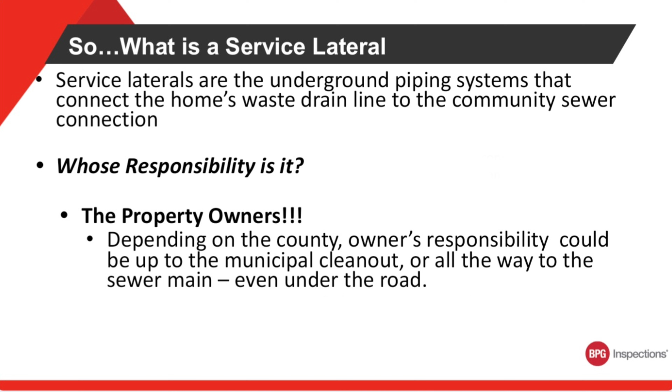So we're going over our basic sewer and camera inspections today. That's the inspection from the main line, or the exit line from the house to the main line on the street. So we'll cover all of these through the webinar.

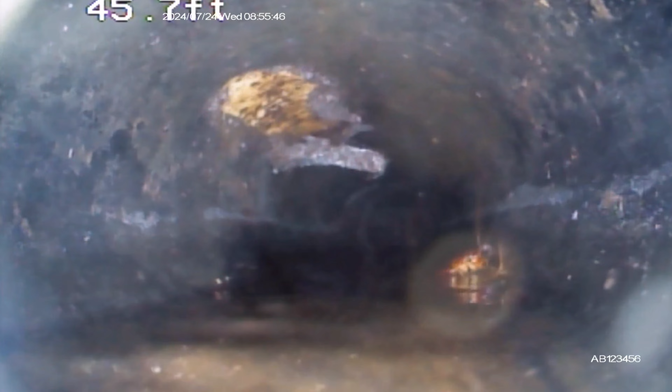We can have problems with new houses, we can have problems with old houses, and as a real estate agent, it's kind of your job and your responsibility to bring that attention to the buyer or to the seller. It's a very easily overlooked system in the house that costs a lot of money to repair.

So this is where we fill in the void, and the whole purpose of doing the sewer camera inspection is to find any debris that might be in the system, any bellies, breaks in the line, offset pipes. It's really to just get a visual inspection of that drain system for the buyer so they can make a decision. We can't provide estimates, but we get a good visual to give to the buyer so they can make a good decision with their real estate agent whether they need to get a plumber to come in and do a full repair or just partial repair.

What does it involve? It involves me using a camera on a very specialized system that has a gyroscopic head to it, so we're always level. When the camera head goes down the pipe, it does a lot of back and forth, but it's always level, and sometimes it goes underwater, telling us that there's a belly in the pipe. Sometimes those are small problems, sometimes they're big problems, but we're not going to know that until that camera gets into that pipe. So it's really important as a real estate agent to be recommending that to your buyer or to your client.

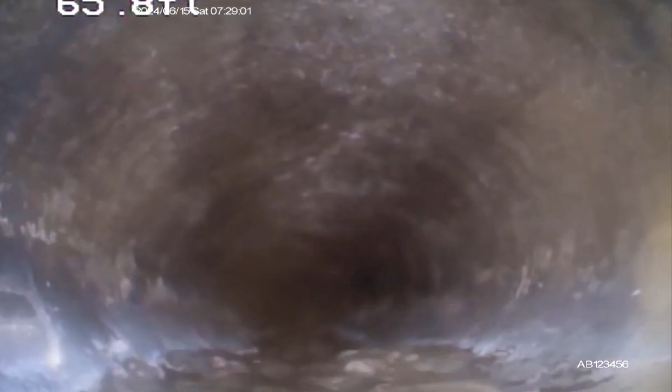Peace of mind is going to go a long way knowing what's underground. A lot of home buyers don't even realize that there's a sewer pipe. They don't even know what it is. They don't even know it's there. Every house has one, and it gets overlooked a lot by real estate agents. It's very common to see a real estate agent just be like, oh, it's a 10-year-old house, ABS pipes, you don't have anything to worry about. And I used to do that too. I didn't want to create more stress.

I would add to that, Dan. It's not just real estate agents, it's everyone. It's one of those things that you just don't see on a daily basis, so you don't think about it. Right. And I don't think about mine either, ever. Until you have a problem, then it becomes a big problem.

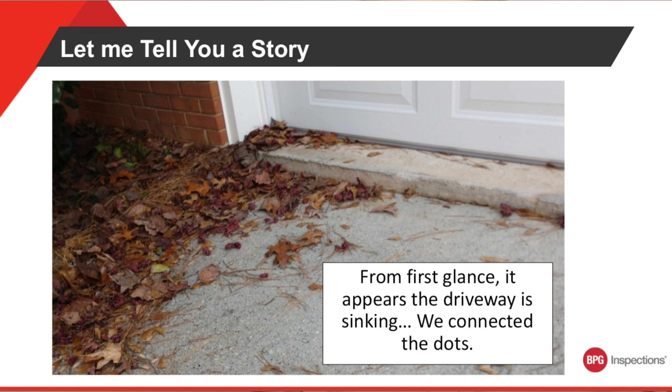But taking a look at a couple examples here, we're looking at the front of a garage where you can see the concrete has settled in the front. We've got some buildup of debris, some leaves. So that's telling me that it's a low spot. It's likely collecting water. And this is not going to be good for your plumbing system if you have drain lines mounted below the driveway, because the driveway is just slowly going to be compressing on top of the pipe.

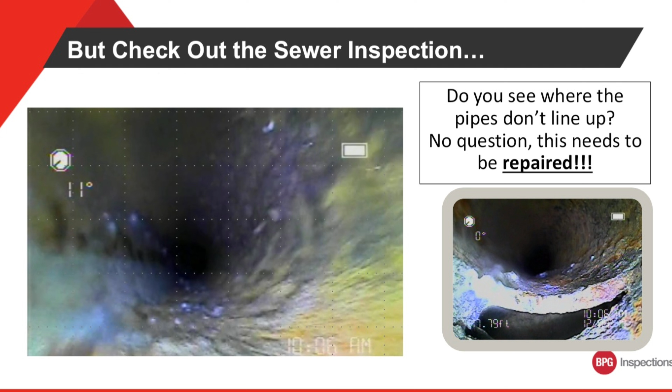So it was really good that we did a sewer camera inspection on this one, because what we found were some offset cast iron pipes. And when the pipes get offset like this, doesn't matter if it's uphill or downhill, you still have water that can get out of that pipe and create more settlement concerns at the corner of that driveway. So now it's not just settling because of roof runoff or driveway runoff, it's settling because of sewage buildup in that area. So it's very important to get under there.

And this repair is probably going to take digging up the slab. So it's going to be expensive, very expensive. The buyer walked away on the deal. They were grateful that they had the sewer camera inspection, that they didn't have to pay for it, but now the seller has to deal with it, and they probably weren't aware of it either.

So as a listing agent, it's a good idea to get a sewer camera inspection so you don't have to face this. Now that seller is probably going to sit on that house for another week or two until another buyer comes through, and then they're going to have to disclose that or repair it. It just slows down the process by not getting these inspections done sooner than later. And it costs thousands of dollars. Every repair on a plumbing system is going to be over $1,000. There's hardly anything that's cheap when it comes to these repairs.

So the buyer walked away and found another house. So we saved the day on that one, but not all the time can we save the day, because not everybody gets a sewer camera inspection.

Cleanouts are usually found outside the home, near the foundation, in the basement, or in the crawl space. And that's what we were talking about before, those black cleanouts. They could be in the front yard, they could be in the backyard, depending on what year your house was built. Here in Phoenix, some of the older houses drain out to the alley in the back. Most of the newer developments will drain out to the street in the front.

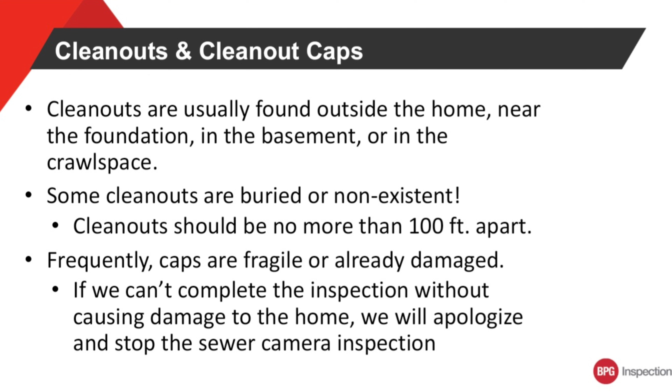And sometimes in the close developments where a lot of these houses are just wall to wall, they'll have cleanouts in the driveway with brass caps on top of them. So there's no problem with that. We just have to make sure that there's no settlement going on in that driveway when those pipes are below that concrete, because that's a lot of weight, and all that weight can push around on those pipes and create some problems underground that you're not going to know until you get that camera down in there.

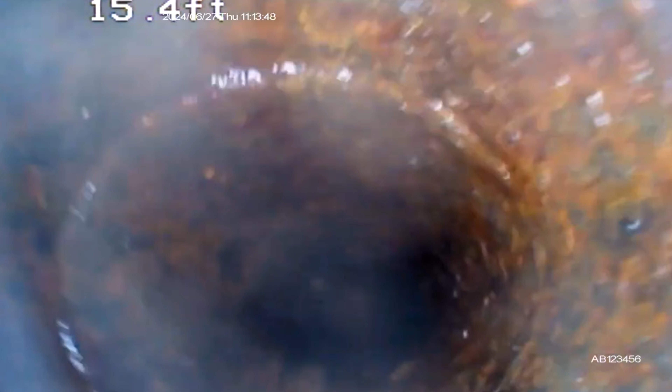Some cleanouts are going to be buried, non-existent. It's one of my biggest issues doing sewer camera inspections, trying to find the cleanouts. If I can't find a cleanout on the front or the back of the house, I'm not a plumber, so I'm not going to be pulling toilets or pulling sinks to get access to the drain system.

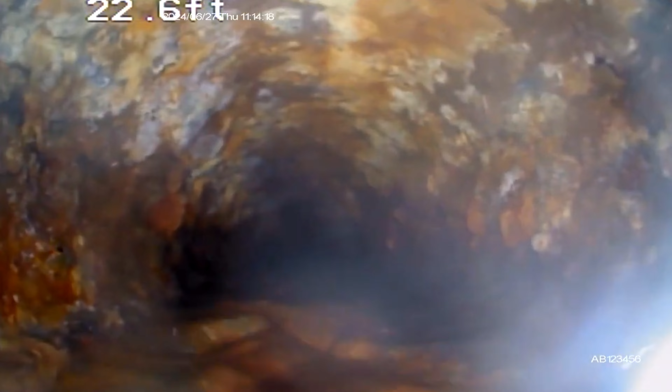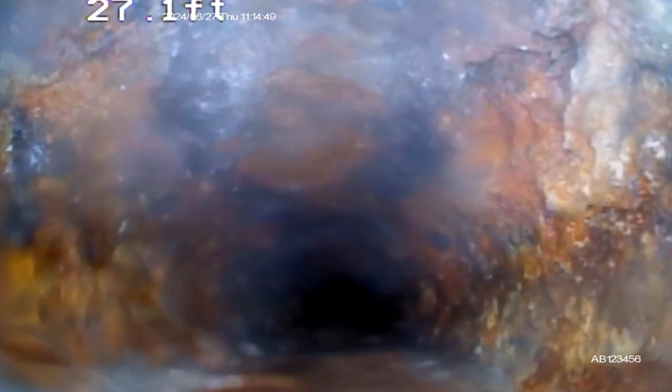So my only option at this point is to go up to a roof vent stack that goes down into the plumbing system, and that'll drop my camera 15 feet down from the roof surface, and then it starts to go horizontal. So I've got 100 feet of cable. We've got a 15-foot drop, so I can get roughly 85 more feet of my lateral done. And chances are I'm not going to get out to the city. Chances are I'm not going to get that whole pipe inspected.

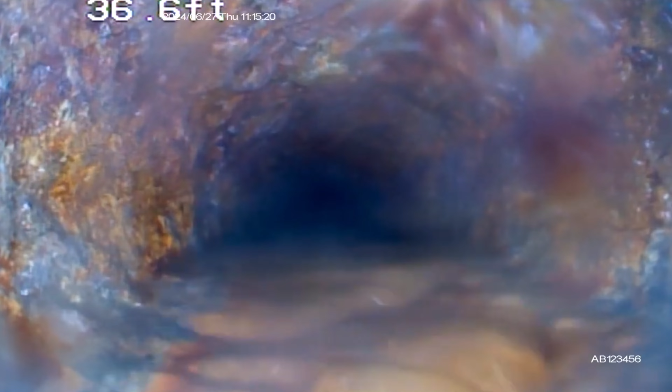And that's why cleanouts are that important. You're not going to get a visual of the pipe system without those cleanouts put in. They're called access points. And it's good to have that access point, not just for cleaning, but for inspecting and knowing what's underground. Frequently they're broken, and we try to carry around a few of the caps with us on site, so if they get broke, if we break them just trying to unscrew them, or if they were broken when we get there, we'll just replace it.

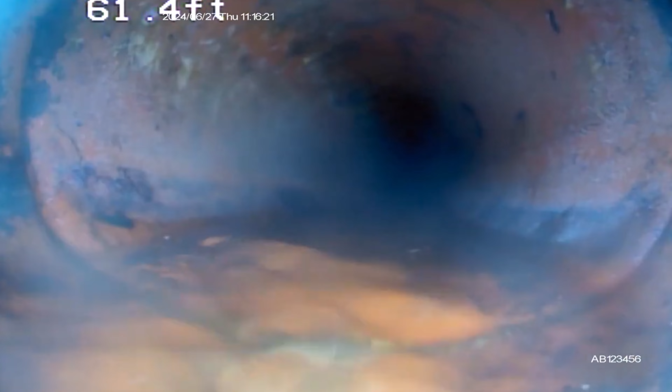We don't want those sewer gases to be escaping out, whether it's in your front yard or your backyard. We don't want you to be breathing that in, so we cap those off. Yeah, so we're looking at a few cleanouts. The ones on the very far right of your screen are your typical black ABS cleanouts. It's called a bullhorn cleanout.

One pipe is going to go down and angle off underneath the house. The other pipe is going to go down and angle out to the street. And that gives us access in both directions of the pipe, so we can usually get your entire system scoped when we have a cleanout. But sometimes they're really hard to get to.

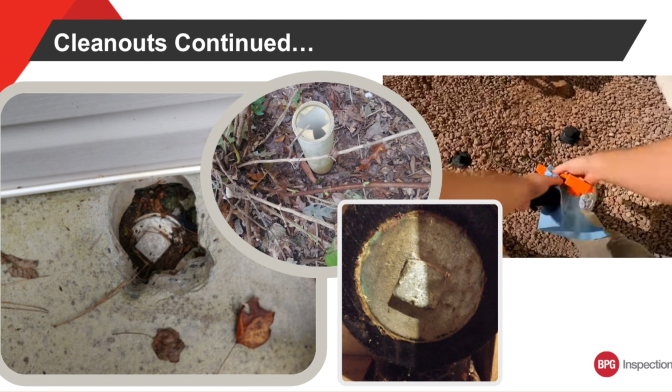You can see it's in the slab there on the left-hand side. It's really hard to get anything in there to unscrew that cap down. So in a situation like that, we're probably going to recommend that they mount that in a different location, but we're going to do our best to get the camera down in there.

And the ones in the middle, you know, there are all sorts of different cleanouts depending on what part of the country you're in, what year your house was built in. But like I said, that's probably the hardest thing I have, is finding these cleanouts and digging them. So we don't use a locator with BPG inspections. Most of us don't use locators.

We do use some third parties that use a locating service, and it would be helpful in certain situations if you can get access to that pipe, say underneath a sink, and get in underneath where the cleanouts are supposed to be, and then you could use a locator to find where to dig to find those cleanouts. But other than that, there's no real sense for us to use a locator because we're not doing your repairs. We're not doing the digging.

So I don't want to mark something in your backyard and 3 days later have a company come in and dig 5 feet away from it because the landscaper moved that flag 5 feet over. It creates a lot of liability for us. So it's really the company that does the repairs that should be doing the locating of the problem, so they dig in the right spot. We're not 811. We do our best to find the problem, but we shouldn't be locating it and then having another company dig to find those problems.

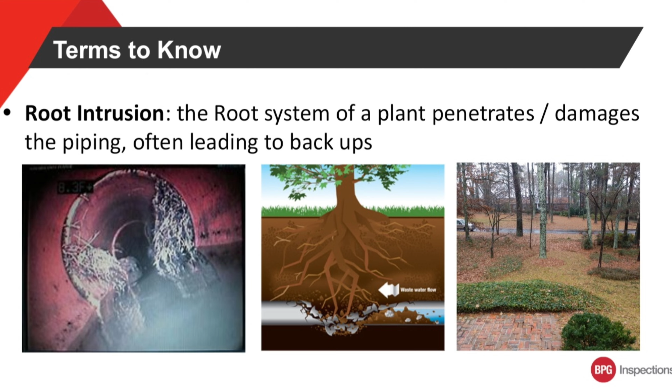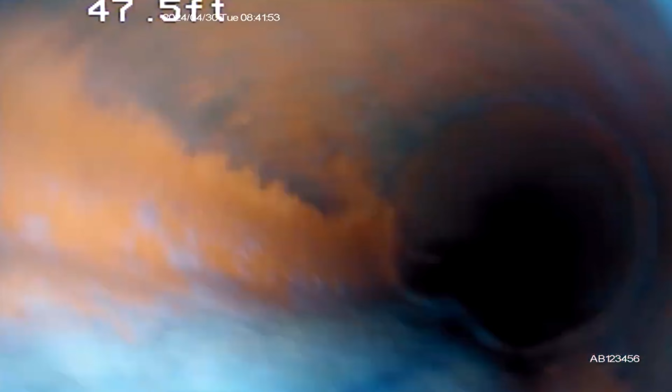We're looking at a few issues of roots. So something that happens with clay tile pipes fairly often is roots will get in where the two pipes connect. So clay pipes are not a solid connection. They leave these little gaps where these roots are very easily pushed through, and the clay will break. If you've got pressure from some roots, you'll get that clay to crack underground. Just like in that middle picture, the roots are just crushing that pipe.

And now you're just gonna have constant backups. Yeah, you could get a Roto-Rooter in to clean that out, but the pipe is broken. And if you're buying that house, you're gonna wanna get that replaced. And that might entail removing the tree to get access to the drain pipe because it's right below where the tree is. This is an expensive problem.

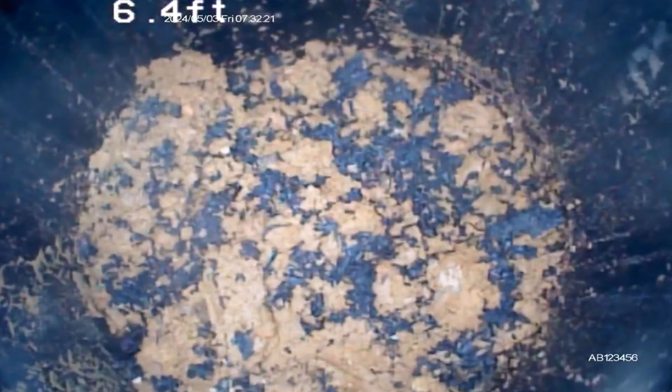We don't run into this with all pipes. ABS pipes don't have as many roots. You can still have problems because you still have junctions, but clay pipes on your older houses are going to have more issues like this just because of how they're made and how many openings there are. There's a lot more of those intersections or joints than there are in ABS.

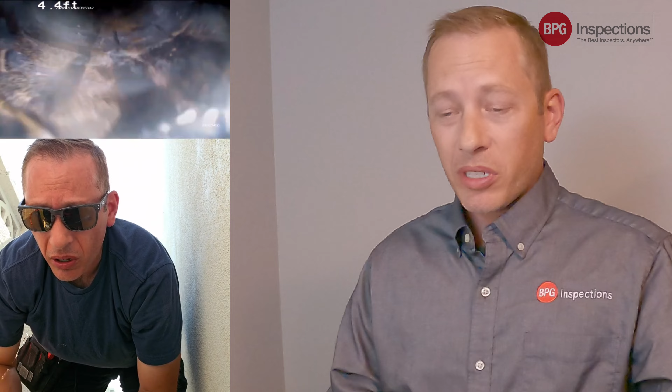A belly is a low point in your pipe. Some bellies are a big problem, some bellies are a little problem. Most of the time I see a belly, I'm concerned about it slowing down the flow of water. So when you're draining water out of a house, you want a good flow to make sure that water gets out to the city. If you've got a pipe that has one of these in it, a belly, it's really going to slow down the flow of water.

And now you're going to build up debris and everything else inside this little belly. And if you don't run your plumbing system for a while, it'll build up on the walls and get hard and crusty, and then you'll have to clean it out. So smaller bellies that don't build up debris are usually not a problem that needs to be fixed or addressed. Bigger bellies where it starts collecting debris and causing slowdowns in the flow should be addressed. So sometimes bellies are going to be red action items, sometimes bellies are going to be blue consideration items. Definitely talk to your inspector about it and get the best course of action for your situation.

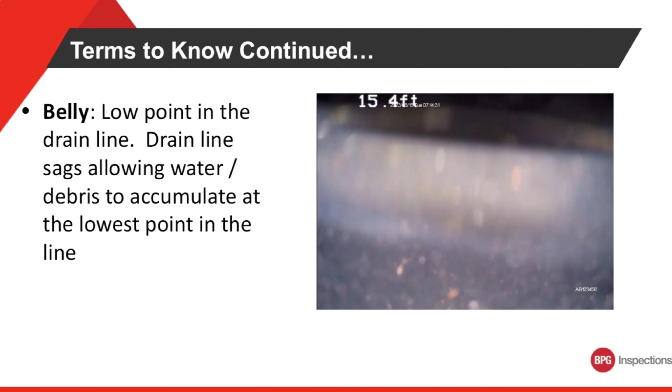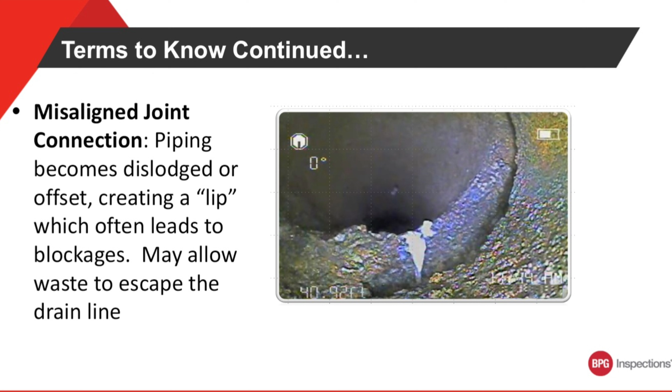Just giving a little background on that one also, that property was a new construction property, like Dan talked about before, where sometimes they'll get construction materials down into the line. Well, unfortunately, this one, they didn't clear the line. We actually did this property in Georgia for a realtor that wanted a scoping done on their new construction house they were buying.

As soon as the vendor that we use in this area went into that line, they ran some water to lubricate the line, and pretty much within the first 15 feet started finding a pretty high water level in there. The suds were coming up from that material that got put down there, and then they had to come back on a new construction home that they were releasing to someone and completely fix the stuff they put down there. Unfortunately, sometimes they don't clear those lines, or someone forgets to, or someone puts something down afterwards, and this is kind of the result that you see.

Yeah, good point. Every new house has got some type of debris in the pipes, and we just need to get in there and make sure that everything's cleared out. It's a really good practice to do it on a new house, just to CYA a little bit, cover your butt.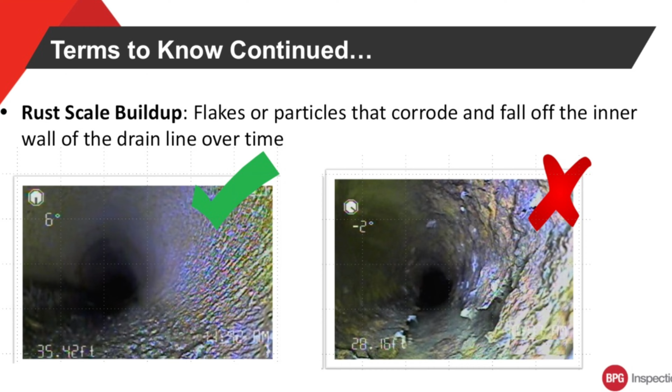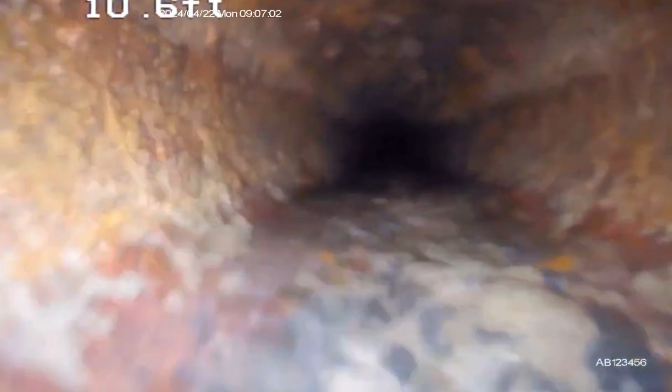So a rust scale buildup, we're going to see this on our cast iron pipes. The left side, it's typical to see a little bit of scale, little bit of pitting, nothing crazy. At this point in their life, cast iron is going to be rusted. It is going to be scale buildup, just like it is on the right side. And all those little rough edges, just like they grab my camera head and grab the camera cable and cut it, it grabs all the debris that comes down that line and it builds up on the side of the pipe, and it just gets worse and worse.

Just a quick story about these cast iron pipes. I did a townhouse in Scottsdale about 4 months ago, and it was completely burned down before they sold it. So they rebuilt it from the ground up, slab on grade. So everything above that slab was replaced brand new. And it was a townhouse, one in about 12 buildings identical in a row. But this one was brand new because it had been burned down.

But when we did the sewer camera inspection, we found a blue lined cast iron pipe. So they had come in through and they had lined that cast iron pipe. It was still all pitted. You could see all the bumps and bruises all over in it. But for the most part, the flow was still good because they put a new liner in it. But that buyer, they should understand that that pipe is original to the house.

It was not replaced with 99% of the rest of the things in that house that were replaced after the fire. The only thing I can understand is the insurance company didn't approve to put a new cast iron pipe in there, but they did approve to maybe line it because it wasn't damaged during the fire. So now you're buying a condominium or a townhouse that has a sewer pipe that is not only 40, 50, 60 years old, but it's lined, and you were told that it was brand new when in essence it was just lined with a plastic liner.

So you'll get some years out of it. You might even get a warranty from the company that did the lining work, but you're not going to get a brand new pipe like they were asking. And the deal fell through. There was nothing I could do about it. I just presented the facts the way they were. And the buyers, they couldn't get any negotiations out of it because the sellers assumed that it was a brand new pipe. So we just went back and forth on that a little bit.

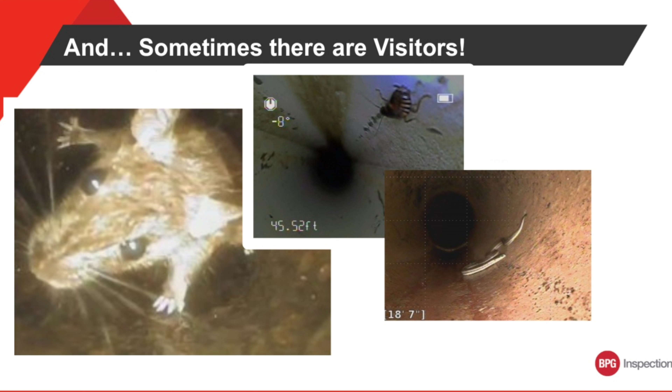You might even get some rats, some snakes, some spiders, some cockroaches crawling at you, and those are usually indicating that there's a break in the line. They're getting access to your drain line somewhere, so it's really important to get those cleaned out. You don't want some of those coming up the shower drain or the toilet drain for that matter. Having an older home and a great home inspection, but no sewer camera inspection, can lead to very costly upgrades.

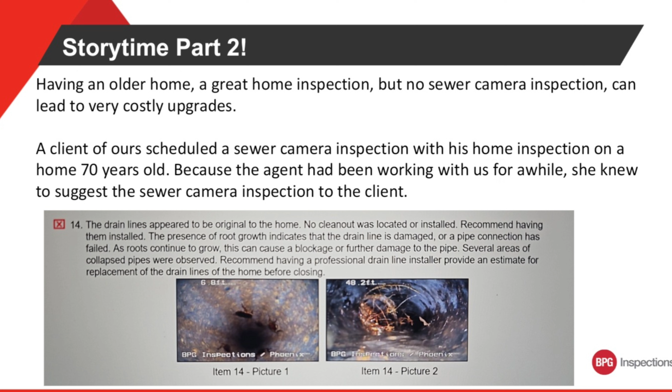We're looking at this call out. Now this is what you're going to see on one of our inspection reports. This is an action item because it's red, and we're looking at the inside of these pipes. The root growth is actually starting to block the flow of water going down the pipe. So the more root growth that is in these pipes, the slower the water flows down.

And we can't even get a visual of where the pipe is broken because the roots are stopping the camera head. So we get down as far as we can. Sometimes we can't get to the city because things will block our travels. So there might be a 10-foot section that we can't get into and we can't examine because of the root

growth. At that point, we're going to call out a plumber to come and clean this line out and do another sewer scope to get that remaining 10 feet aligned to make sure that the remaining 10 feet looks good. Now, if you have root growth, there's probably going to be some issues in the pipe, so you're going to want that plumber to provide you an estimate for the repairs as well.

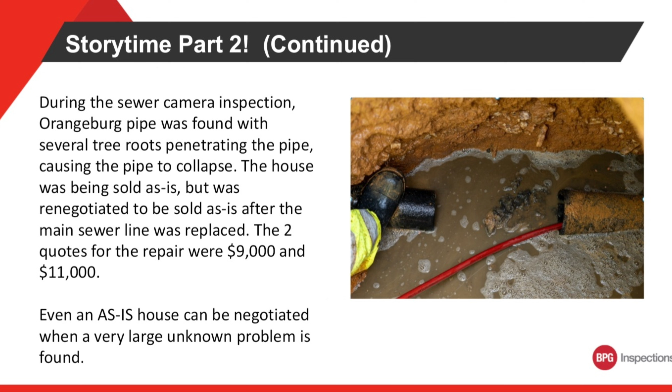Orangeburg, lovely Orangeburg pipe. I don't know how many people across the country have to deal with it, but we have it in a couple of towns here in Arizona, and if we run into it, it's time to remove it. It's basically cardboard paper surrounded by tar, and there's nothing really protecting that structurally besides tar paper or cardboard and tar. So the more time goes on, that pipe starts looking oblong, the pipe starts getting wider and shorter,

and the bottom of the pipe will actually be completely deteriorated because there's been so much water and debris flowing through that Orangeburg pipe. Now the camera head is just traveling on rocks and debris in the bottom of the pipe, and there's no pipe on the bottom. So Orangeburg that's been installed in the 50s, 60s needs to be removed. There's no house where Orangeburg is still in really good condition that I have seen.

So this is a big job. They don't put Orangeburg underneath a house. It's usually from the house out to the street and the yard. So a repair like this, you're anywhere between $5,000 and $15,000 in Arizona anyway. It's a big chunk of change to put towards a house, and if you don't have that sewer camera inspection, you can't ask for it. You don't even know to ask for it. It's as simple as that.

So there's always things that we can do to provide you more information. Those sewer camera inspections are a big step and a big addition to our company, BPG Inspections. Realtors need to trust us to come in and provide that information to them and their client. We are an unbiased opinion. We're not trying to sell you any repairs. We're not trying to push you to get a replacement. We are trying to protect your client the best we

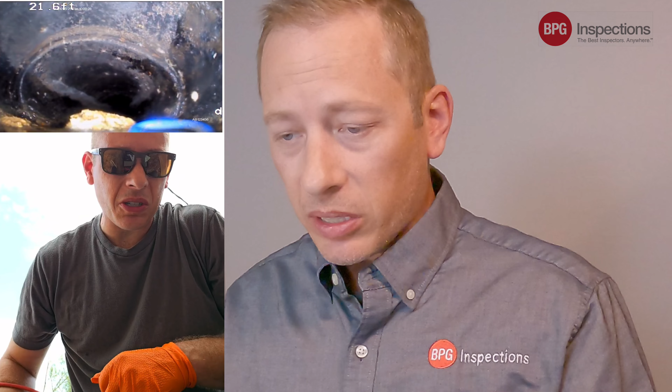can. So it really builds trust between the real estate agent and the client. When the real estate agent is recommending these sewer camera inspections, we want you guys to take the credit for it. As the agents, we want you to say, hey, I was the one that recommended it. Look at what we found. We found this major problem underground. I saved the day. That's fine. I want you to take the credit for it. Be the hero in your client's eyes.

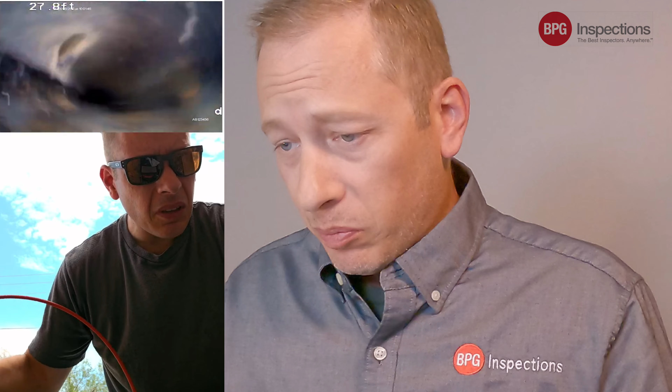That's fine with us. We're going to do our work. We're going to get paid for our work. We're going to find that information. We're going to give it to you. But we want you to be recommending this to your clients because it's going to save the day more times than it's not. If you're not recommending it, you're just exposing yourself to an increased amount of liability if a problem does arise, and then you're going to have to face those problems after the sale. So repairs to the drain lines are super expensive, so get your estimates.

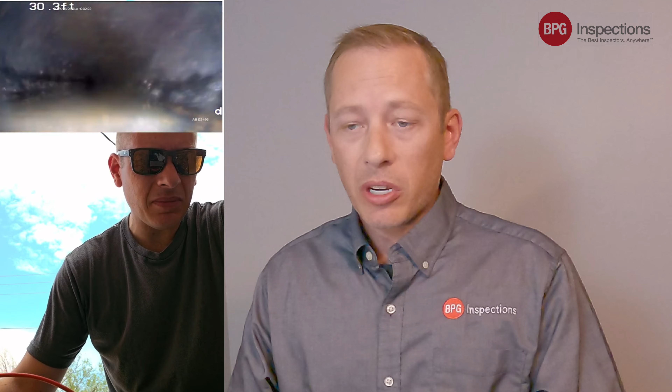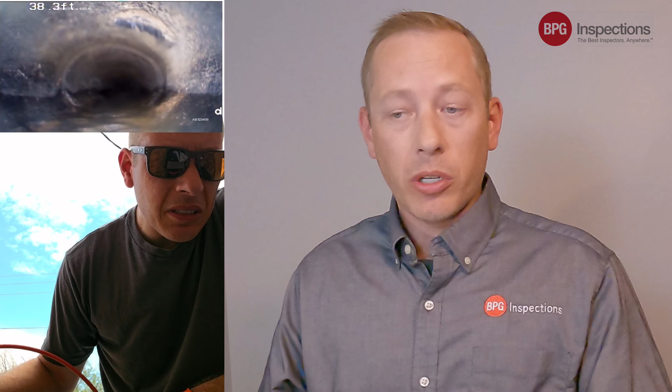If you know that that house has got some problems, if you are buying a house and you're a real estate agent, you know that there's Orangeburg in the backyard, the seller has told you, it's not that I don't want your money, I do. I would love to work for you, but spend that money wisely and just have somebody provide an estimate what it's going to cost to remove that. There's no sense in me coming in to do a sewer camera inspection on something that you know already needs repaired. But I'll gladly do it if you just want to negotiate repairs at the end with the seller.

I think that's about it. Our sewer camera reports are really basic. I've never written one over 5 pages long. We throw some pictures in there.

We throw a link to a YouTube video, unlisted, so you can share that link with anybody that you would like to watch that, both the seller or the agent on both sides. So that's your negotiating power, and we're gonna take pictures of the major problems and put them in the report so you have a paper version of it as well. But you'll get this within 24 hours. Most of our inspectors get them in within 12 hours, but 24 hours at the latest.

Yep. And again, this is a copy of our report. It may look different in some of your markets out there if it's a third-party vendor, just FYI. Correct. Yeah. Pretty basic all the way around.

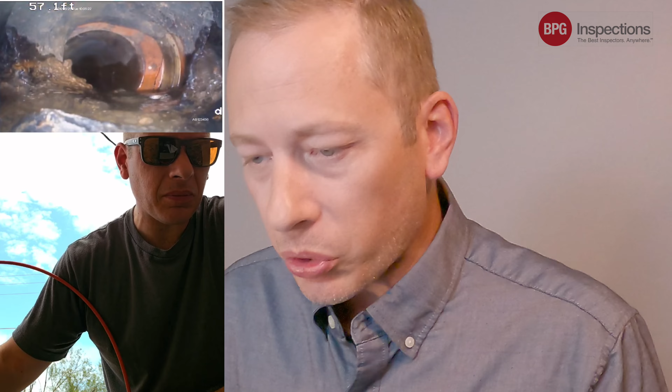Yep. You got your basic advice for homeowners. Use only dissolving toilet paper products. Don't put grease down the toilets or the drains. When you're using a disposal, run it for a couple minutes. You can throw some ice down there to help break stuff up and get some of that smell down. That's not a problem. But don't put anything that's going to stick on the walls of the inside of the pipe. You know, just use your common sense on that.

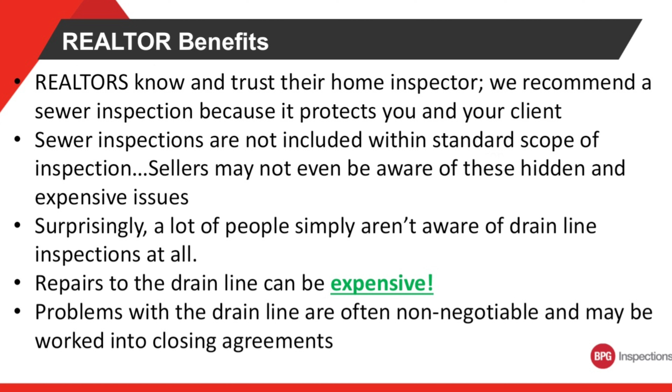High pressure water jetting is the best way to clean out the inside of these pipes. Sometimes they can use little metal roto rooters that bang around on the inside of the pipes. Well, you can imagine what that would do to the inside of a clay tile pipe. If the wrong person or they use the wrong equipment, instead of just using water to clean off the inside of the pipe, if they use metal, something banging around on the inside of the pipe, they could create a lot of damage. So it's things that you need an unbiased eye to examine and give you that evidence for.

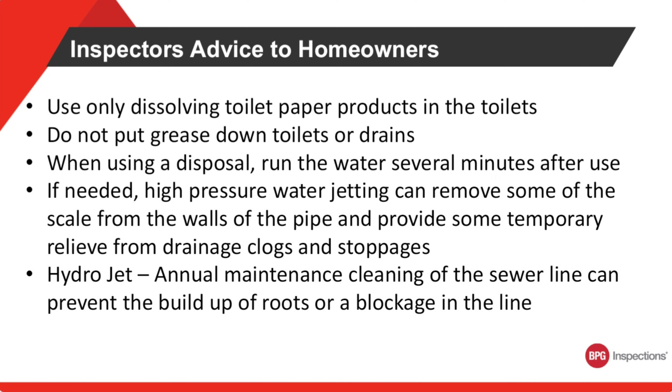So annual maintenance, biannual maintenance, I would recommend biannual maintenance on most homes just to get the lines cleaned out, to make sure everything is nice and flowing good down the pipes. So I'll open up the floor to any questions that anybody has, or Jason, I'll hand it back to you. You probably have some from the Q&A.

Yeah, absolutely. Awesome. Thank you so much for your time there, Dan. So we had a question about repair estimates, why they vary. Again, we don't provide any estimates. I can't help you out there. We're just doing the sewer inspection, letting your clients know there's an issue. What is a belly in a pipe? That's just the low point in the pipe. You just want it to be straight. You know, a belly's a lower point in the pipe there.

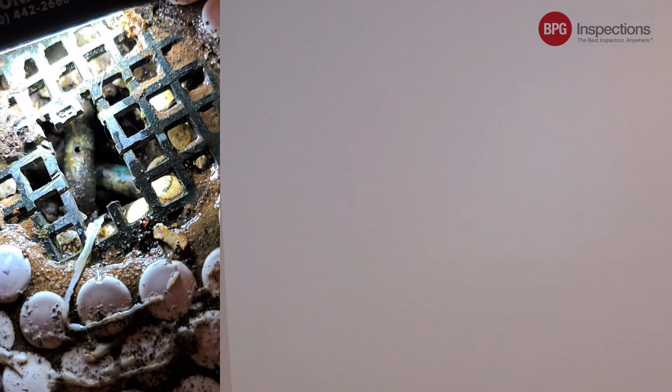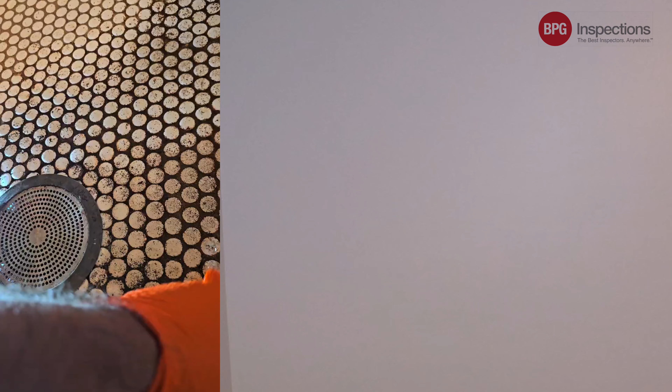A commercial broker: is the cost and process different from residential? Melissa, do you have any experience from our vendors on the commercial side? Yeah, so for the commercial side, it's really not much different. The pricing is going to be a bit different because you're potentially looking at multiple lines, as opposed to residential. Most residential properties are going to only have one line, unless they have like a guest house or, you know, a garage or something else that's got plumbing in it. That's going to be your biggest difference with commercial.

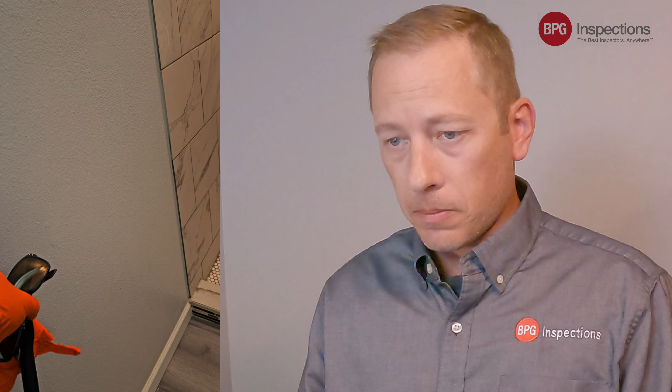A lot of times commercial lines, whether it's going to be, you know, a multifamily property, usually each multifamily unit has its own lateral line. Sometimes they connect together. Biggest difference between commercial and residential is the amount of time you're going to spend on a commercial property. It's going to take you a bit longer because there's going to be more scoping that needs to be done. But the knowledge is mostly the same between both residential and commercial. Perfect.

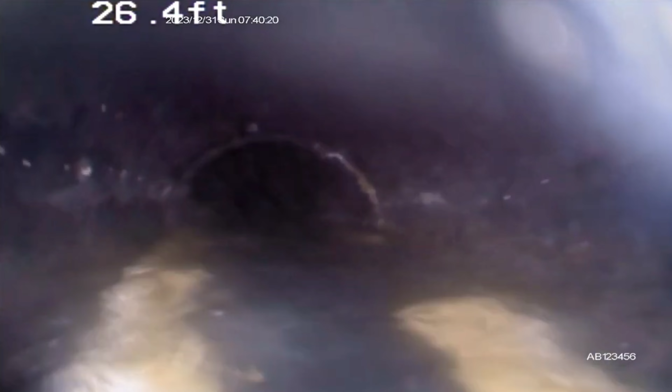Is there an additional fee for that? I believe there would be, right? Yes, there is. Now, if they're doing a toilet pull, please know that they have to completely remove the toilet, and they have to replace that wax ring in there as well. So there is an additional expense to that, because there's an additional expense to making sure that the toilet's reset properly and that we have a new wax ring.

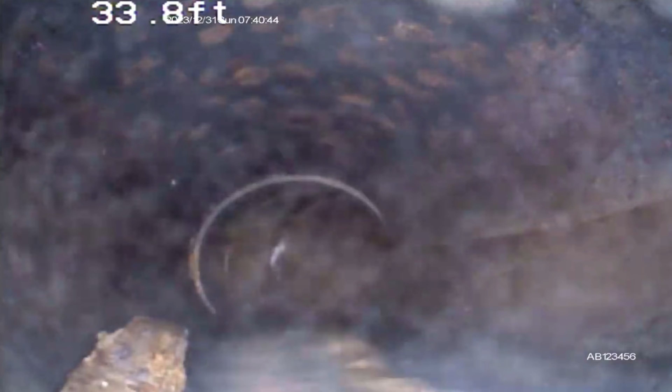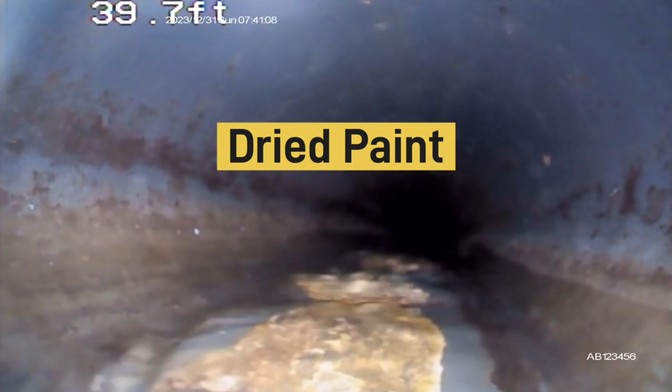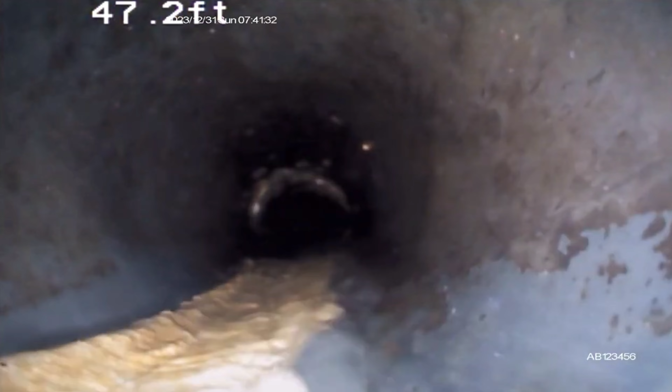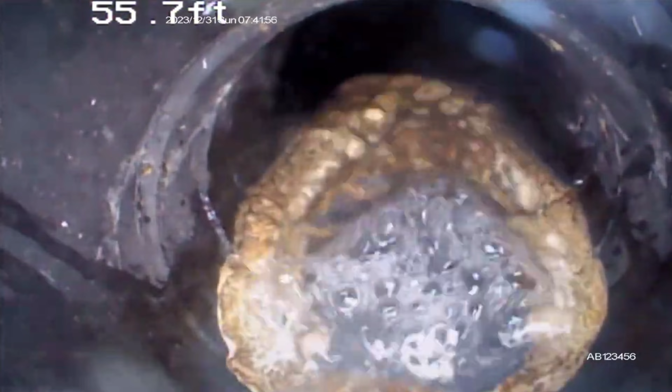In a condo development, isn't the drain... Go ahead. I'm sorry, Jason. I would also add to that and just say to everyone that with the sewer camera inspection, like we said before, there's no way to really look and see that there's problems. Even with new construction, we've come out to new construction where the plumber has just forgotten to glue the PVC together. We talked about bellies a lot of times.

On newer homes, you can get bellies from them just running heavy equipment over where the line was installed. On older homes, you see bellies because compaction over years just happens to drive that belly down. So any sort of house can have problems. It doesn't matter if it's a brand new house or a 100-year-old house. Now, having said that, that 100-year-old house is more than likely going to have a lot more issues than a newer home, but you see them in all kinds of construction. Yep. Awesome. Thank you, Melissa.

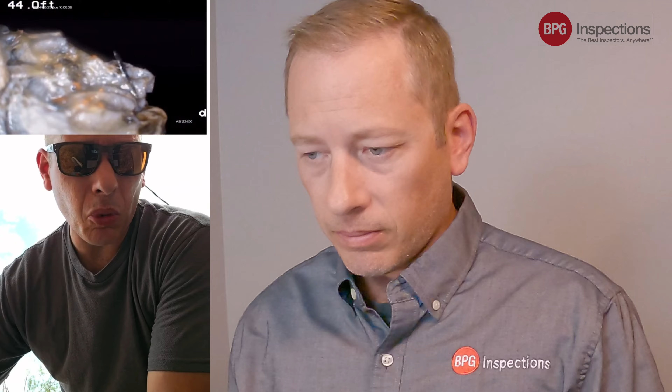In a condo, isn't the drain pipe the development's responsibility? Would you require the association's approval before you do a sewer scope inspection? Have you heard of narrow sewer drain pipes? Yeah, there are some narrow sewer drain pipes. I'll just throw my 2 cents into this quick. I've run into a few condos where they have their own drain cleanouts associated with every unit, and then I've run into certain associations where they have a centralized drain located. So if it's a centralized drain, no, we're not responsible for that, and I would question even selling a sewer camera inspection at that point. But if it had their own cleanouts to the city line, definitely. I would definitely get that looked at.

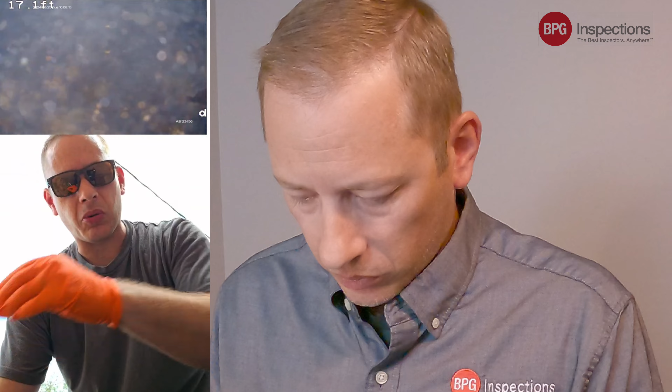Awesome. Great. Yeah, I was going to add to that too, Dan, just to let you know, part of that depends on your municipality too. I know here in Georgia where we're located, there are some subdivisions where the community is responsible for that entire community and everything like that. So really it's dependent upon where you're looking at, how it's set up for that area.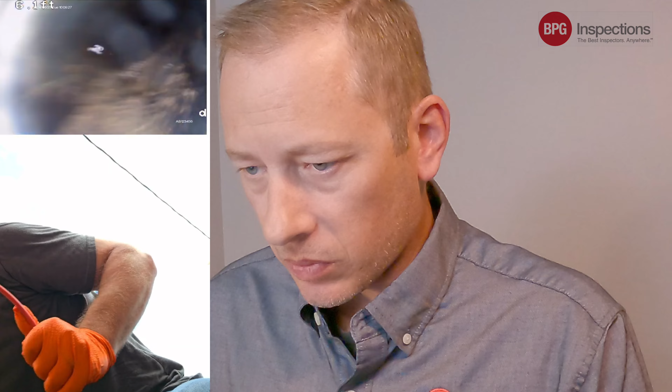Perfect. Do they have Orangeburg pipe in Colorado or California? I'm not sure. Dan's in Arizona. I don't know if we have any experience with that in other markets, but you could definitely ask. I believe in California we do see Orangeburg. Like Dan said, it's not on every house, but we do rarely see some Orangeburg. I'm going to be honest with you, in Colorado, I'm not sure we have a vendor, and I just haven't seen anything come across, but I'm just not 100% sure on that.

Yeah. And we briefly touched on this. How's the scope different in a townhouse or a condo unit, different from a single-family home sewer inspection? Dan, you basically touched on it there with the different kind of lines. Yep, it all depends on what it has. Some of them are different than others. Some are meant to be completely standalone units with walls adjoining. Some are converted apartments. So yeah, it just depends, and the home inspector would have to look at it. Yeah. And then why trees in front yard, not backyard? That's my fault. I just said trees in the front yard from that picture that we saw.

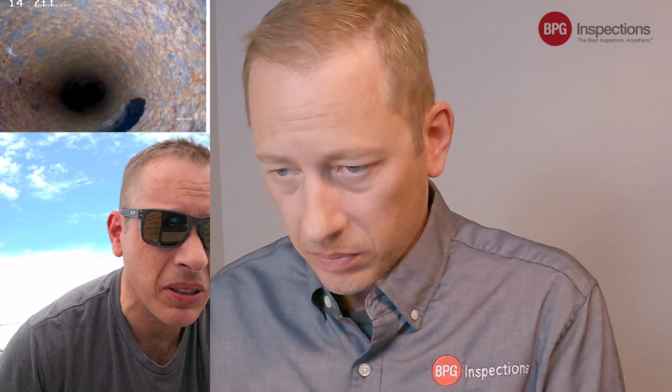Anywhere where the main drain line is, what we're talking about, where you see trees grow over. So if the cleanout's in the front of the yard and you see a bunch of trees in the front of the yard, you might want to be concerned. If the cleanout's in the back of the yard and you see a bunch of trees in the backyard, you might have some concern. We always like to tell agents too, that's something to look for when you're doing your walkthroughs with your clients on properties, to kind of keep an eye out as you guys are walking the exterior to notice the drain line.

Sometimes you'll see them. I know at my house it's very visible in my backyard. It protrudes up out of the ground a little bit. So that kind of gives you an idea too where it's located and if the cap is broken or anything like that. Sometimes when you see it, you can see puddling around the exit line there. So just something to look for there. But that's what we were talking about with the trees. If you know where the cleanout is in the front yard or the backyard and see a bunch of trees, you just want to be concerned with that maybe.